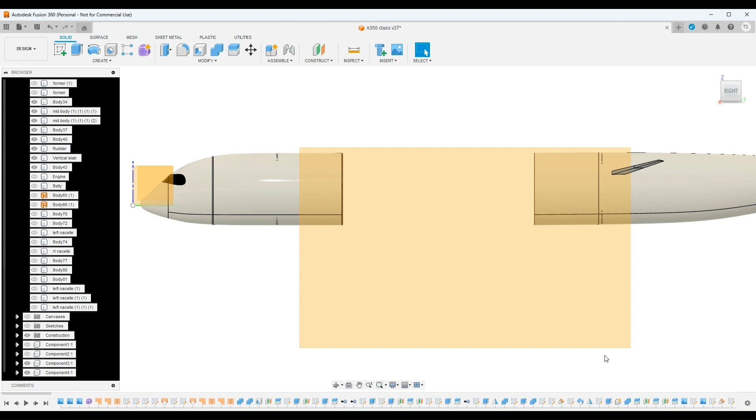First of all, like before, I need this plane. If you follow my last video I showed you how to get this plane here, so I'll just go over it real quick again. Let me turn the canvases on here.

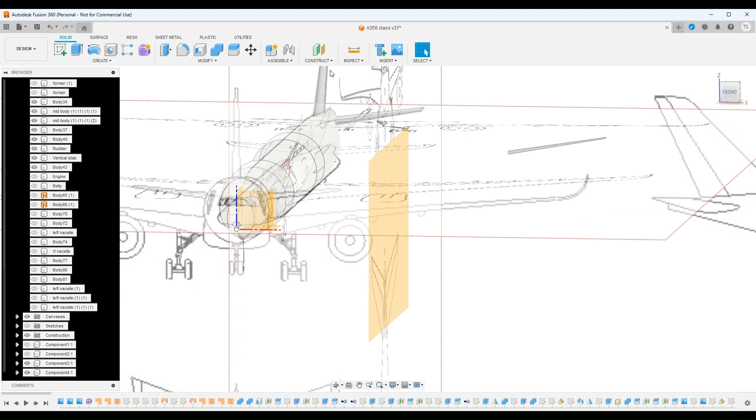This plane needs to be centered here, so you do an offset plane. You come up to construction, click offset plane, then click this plane here, and move that plane so it's in the center, pretty much in the center of this circle here. So you would move this over until it's right over there, and then click OK.

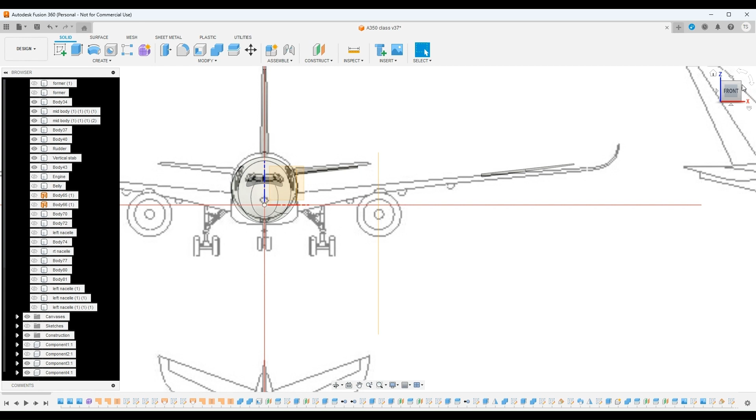But since I have it there already, I don't need this one. So there we are. Next, what I want to do is draw this here, but first I need a line in the center here, and this cone in the back here.

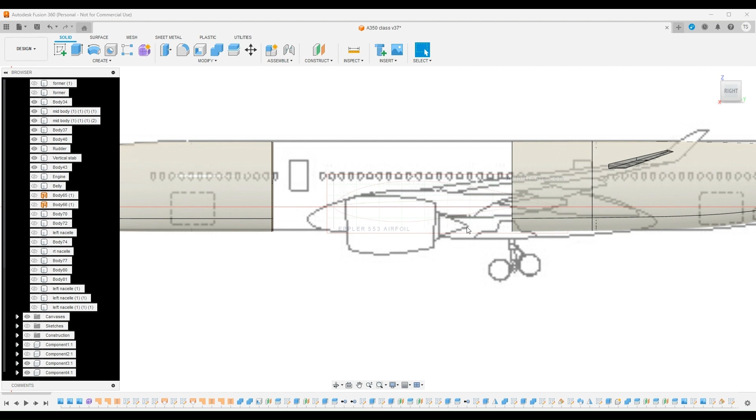Let me turn this construction off. Okay, this right here is the center of this nacelle. So what I'm going to do now is turn the construction back on so I can see that plane. I want to draw on that plane, so I want to draw on this plane here.

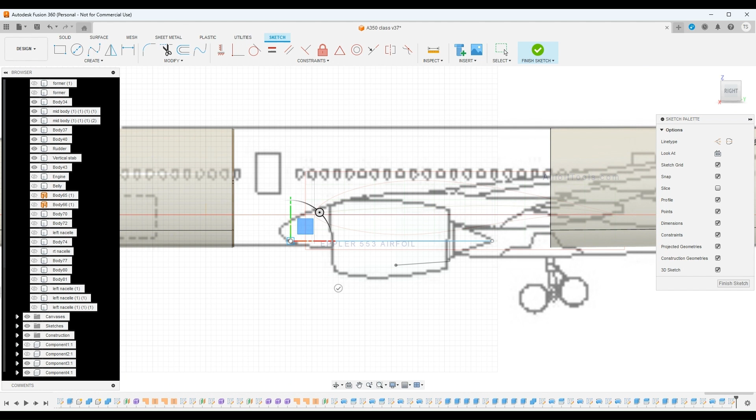I'm going to use a line, L for line, and start here, come over forward, and click OK. And there's our first line.

Next, what I want to do is draw another line from here up to here, and click OK. And one more line from here up to here, and click OK.

Okay, now come up here. We want to do an arc, 3-point arc. I want to use this point and this point. Then I'll just try to match this arc as much to this line up on top here as possible. Click OK. And that's that.

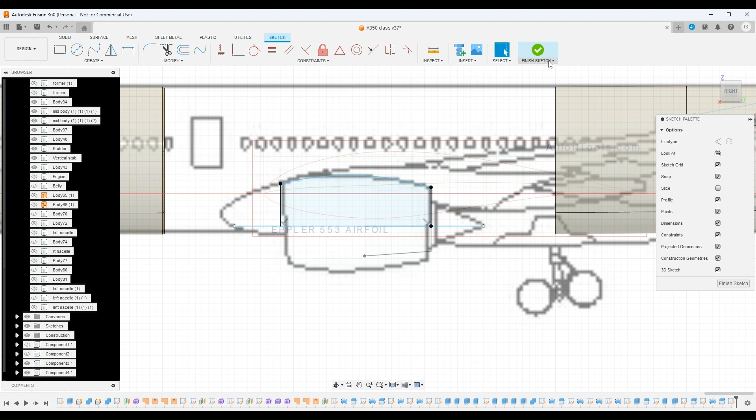Now go ahead and finish sketch. Turn the sketches back on. I'm going through this pretty quick. I go through it slower if you watch my previous video on how I do the nacelle, but it's just showing you right here too.

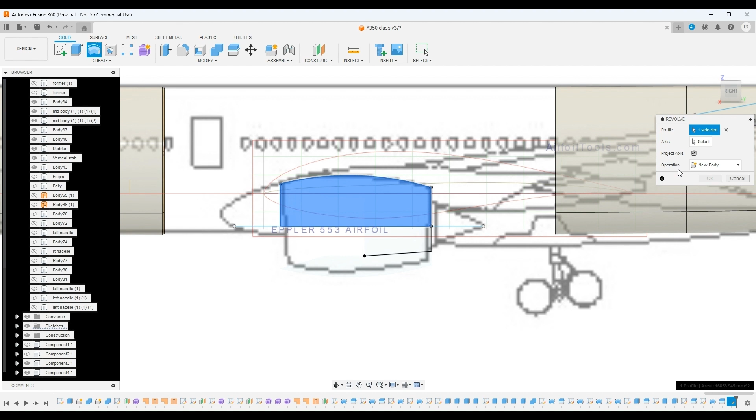So now what I want to do is use the revolve tool, and this is the profile I want to use, and this is the axis right here I want to use, and new body, and click OK. Now there we have our engine nacelle.

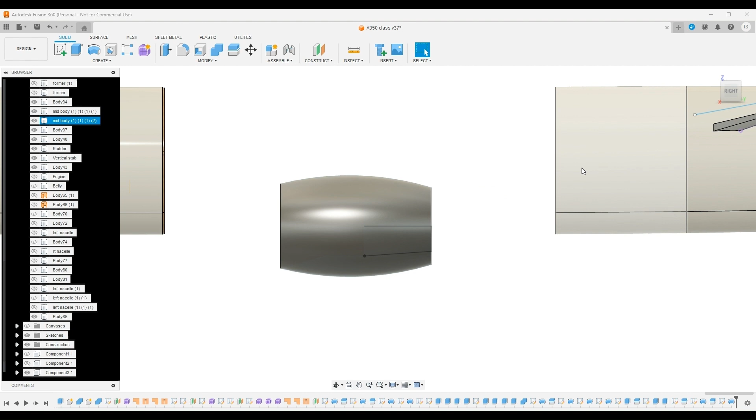Now I can go ahead and turn off the canvases because I don't need them. So this is what we have. Now I need to split this in half.

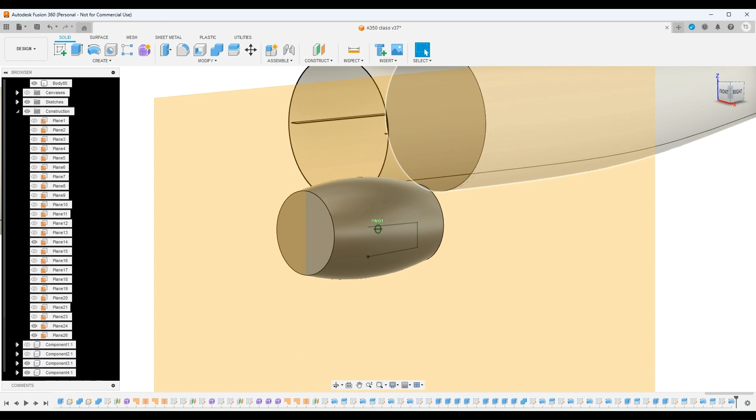So I turn the construction plane back on, the one that I need. Come over here to construction, and it should be down the bottom, the last one that I did. And come up here to modify, split body.

This is the body to split. And the splitting tool, select that. I want to use this plane here as a splitting tool. And click OK. Now I can turn these construction planes back off.

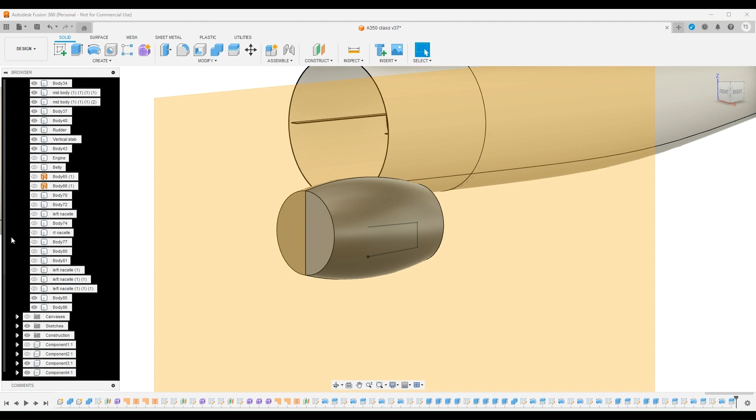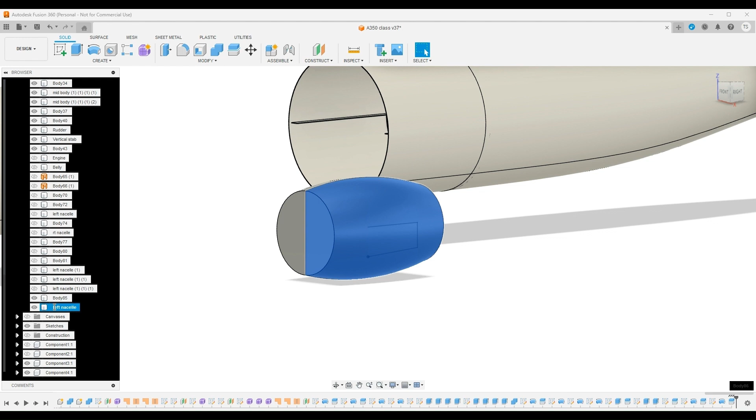Okay, now we have two parts here. I want to turn this part off, the left side. And what you should do is, this being the left side, come down here, change this to left side nacelle. Hit enter. I'll turn that off, and this is the right side nacelle. Now we have that.

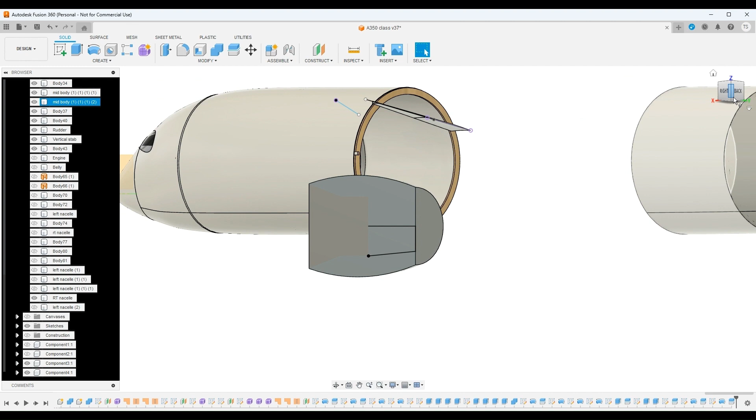Now what I want to do is take the measurements of my fan. I'm using a Wemotec 90 millimeter fan, and the outside diameter is 92 millimeters. So 92 millimeters, and I want to add 25 hundredths to that so this fan will fit down in there.

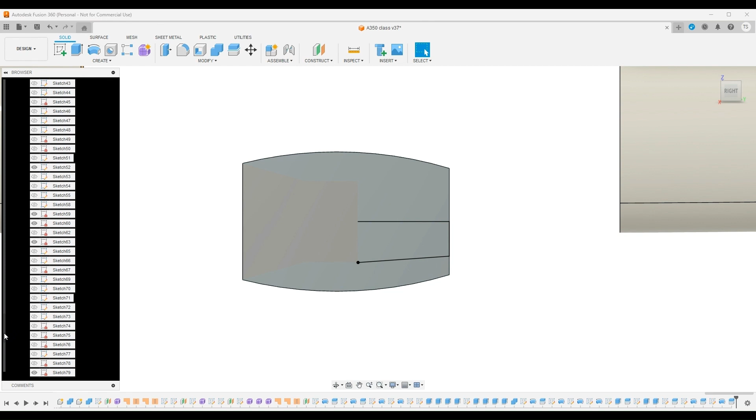So what I want to do is turn my sketches back on, the one that I need with the center line. Okay. Now, like I said, the outside diameter of the fan is 92 millimeters, and half of 92 is 47.

47. Oh, excuse me, it's not 47. It's 45. It's 46, I'm sorry. So we got 46. And like I said, I want to extend it by 0.25, so I need to take that 0.25 and make it 0.13. So 46.13 is what I want.

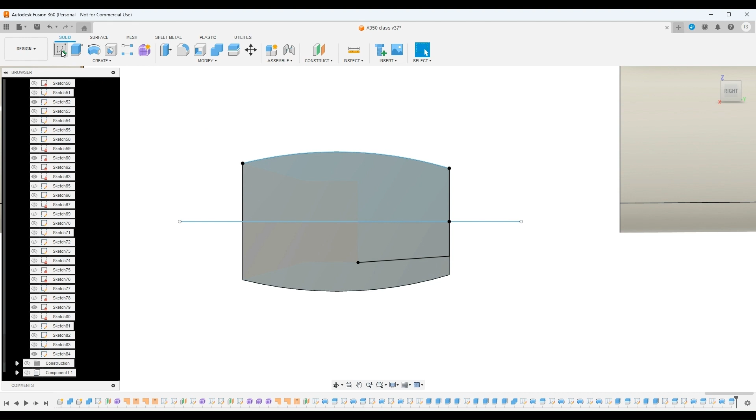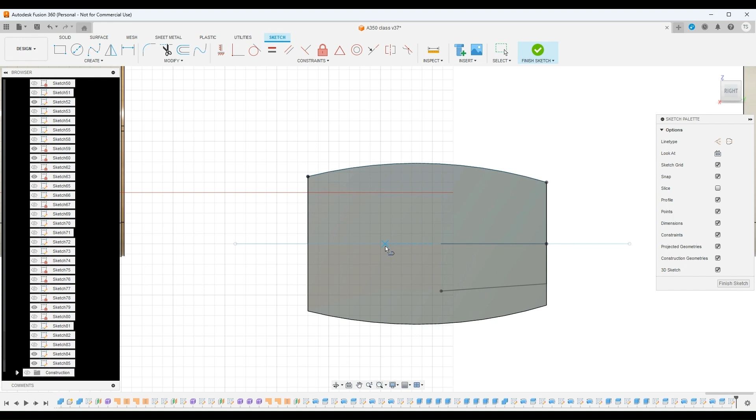So come up here. Now we have create sketch, and we want to create a sketch on this plane here. Now, what you want to do is determine how far your fan's going to go in here, how far back you want it to be. I'm just going to put it right here and start here. So I'm going to hit the letter L for line and click here. And this line needs to be 46.13.

We have that line. Now the next line that I need is the length of the fan. I'm measuring it right now, it looks to be about 59 millimeters. So the length is 59 millimeters.

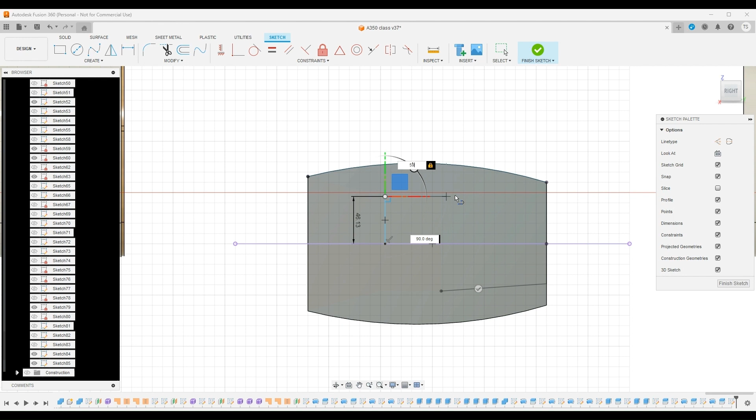So what we do here is type in 59, and I'm adding 0.25 so it will fit in, just a hair bigger. Next line, just straight down onto this line. Click OK. All right, go ahead and finish sketch.

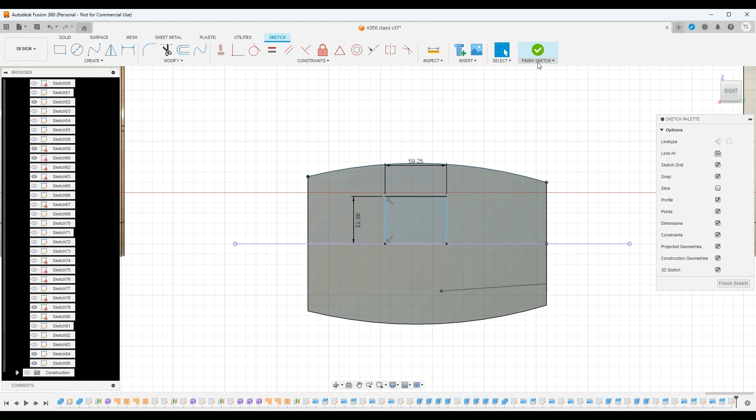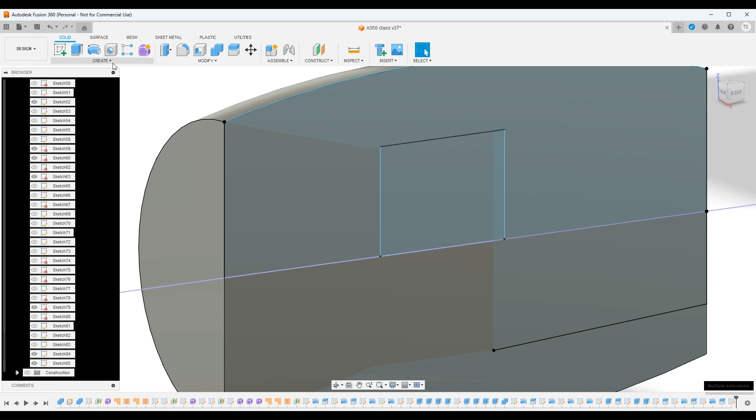Now what we want to do here is revolve this. Fusion seems a little buggy for me right now, but go ahead and give it a shot. We want to use the revolve here. I want to select this plane, and select the axis, which is this, and this is set to cut, and that's what I want. We'll click OK.

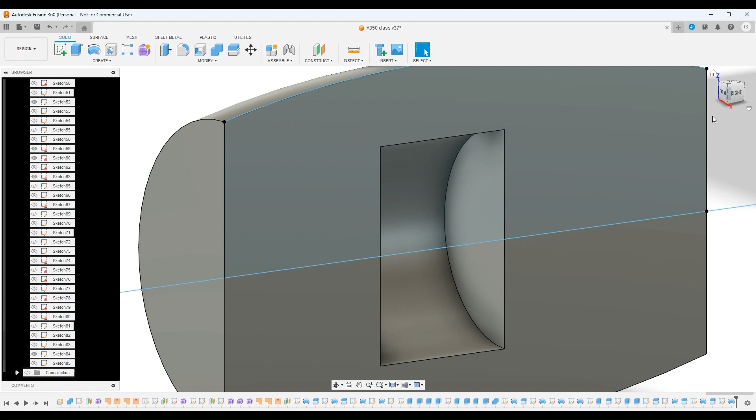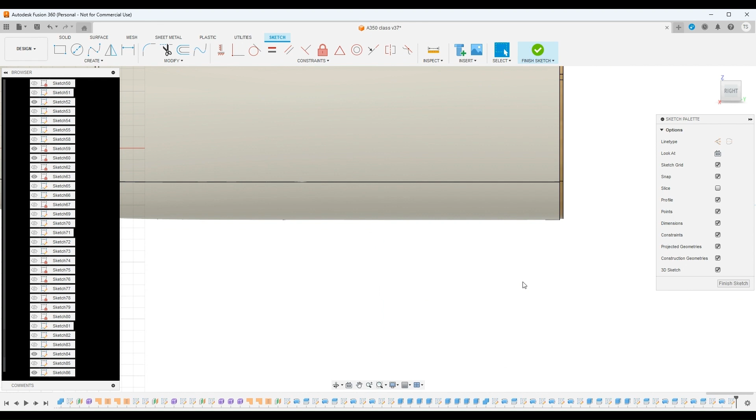That's what we have so far. Now what I want to do next is open up this front here. So we come up here, create sketch on this plane again. Letter L for line. I get this right on there, and draw this line out here.

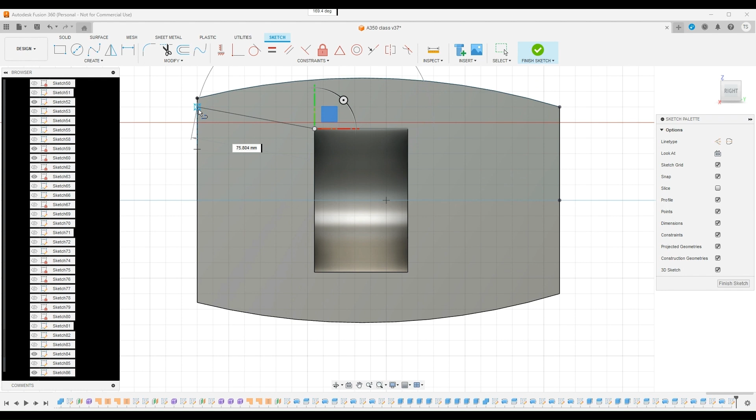L for line again. Here, straight down to here, and go ahead and click OK.

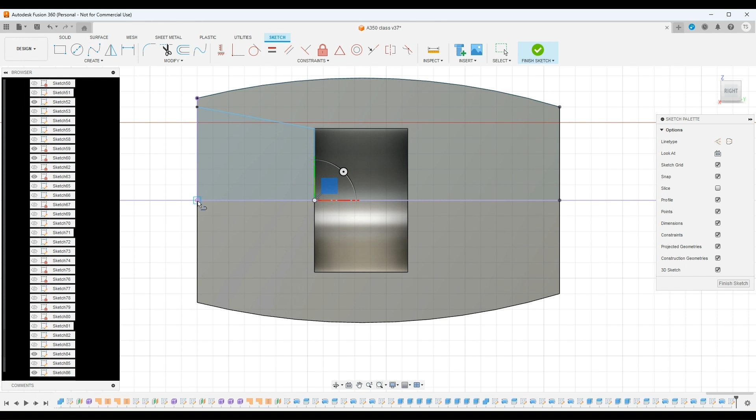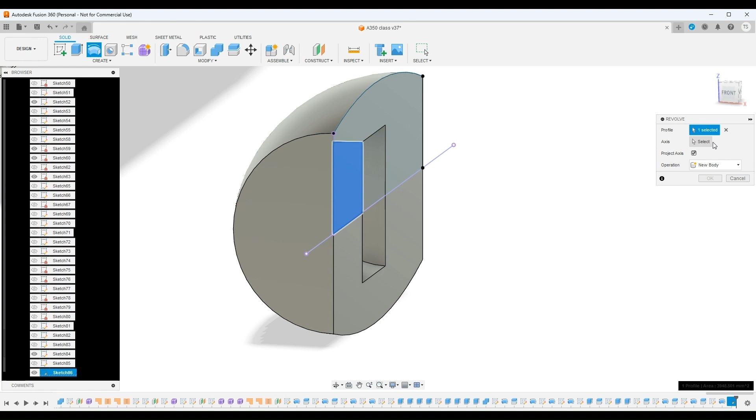Now what we want to do is revolve this. So finish sketch. What you want to do when you do this revolve is make sure this is fully closed and contained. Use revolve again. We want this, and the axis is this, and this is set to cut, and we click OK. Now that's what we have so far.

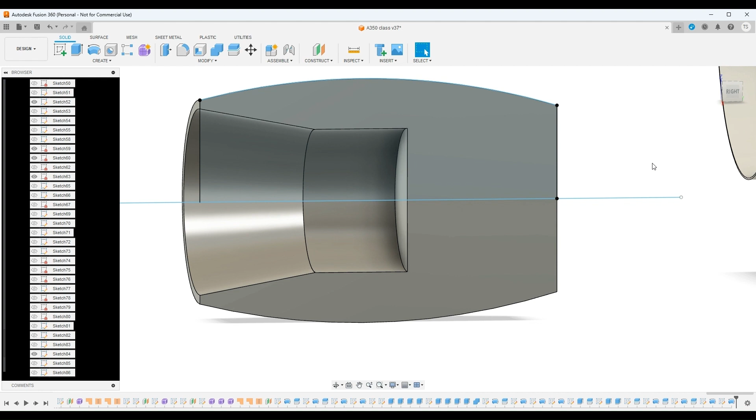Now what you want to do is, before you do all this, the angles and everything, make sure that you have your correct measurements. Right now I'm just using arbitrary measurements except on the fan itself, because I have the fan and I can measure from it.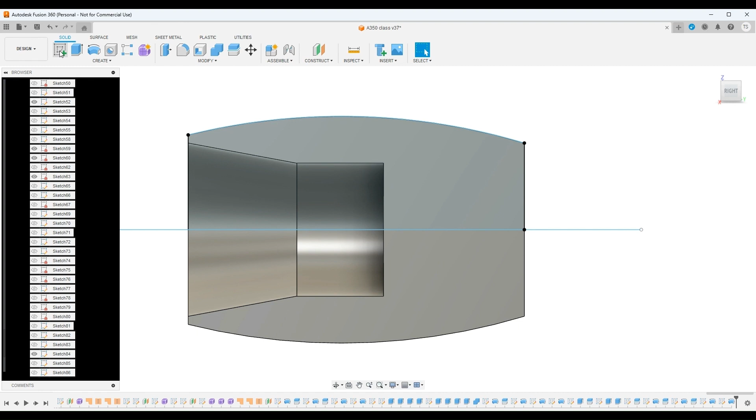Now I want the back here to have an opening. Since this is a 90 millimeter fan, I want this to have an opening of 78 millimeters. So again, we would just come over here to create sketch on this plane, draw on that plane. And we want half of 78, which is 39.

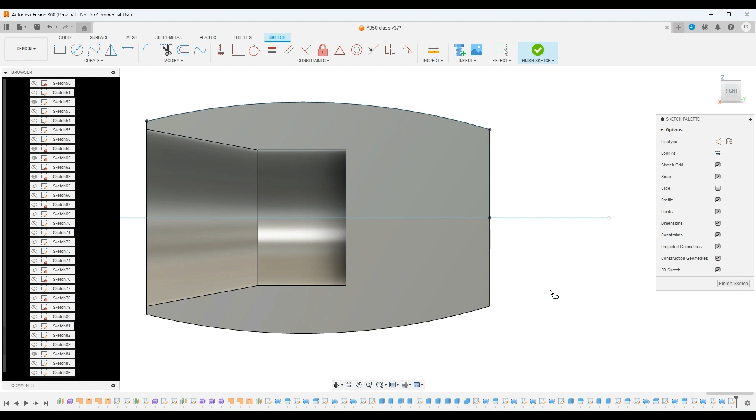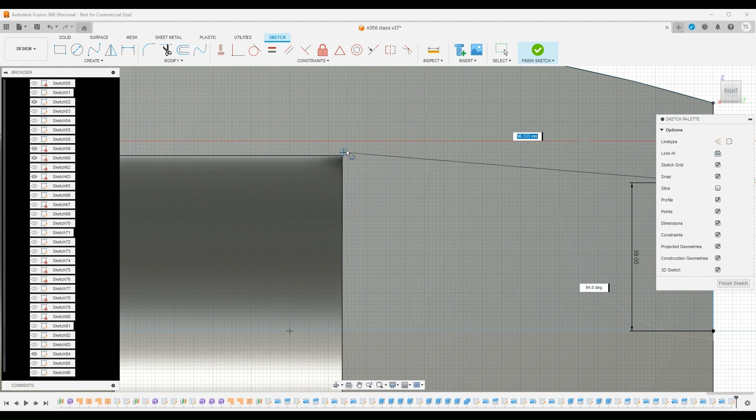So we use the line command, L, and draw a line from here up. We want this to be 39 millimeters. Click OK. Next line, we want to connect it here. And next line, down, just straight down to here. Go ahead and click OK for that.

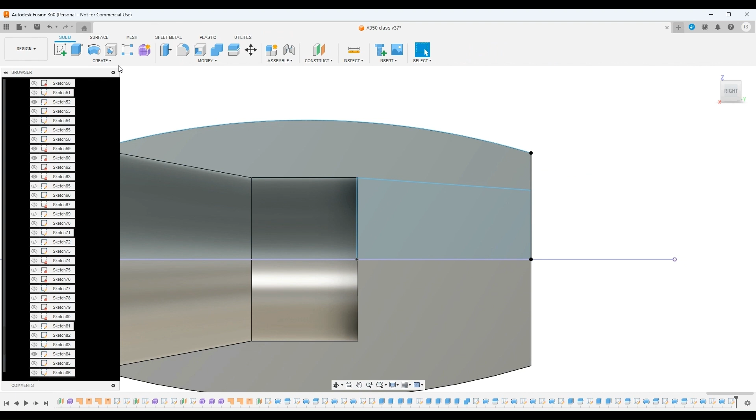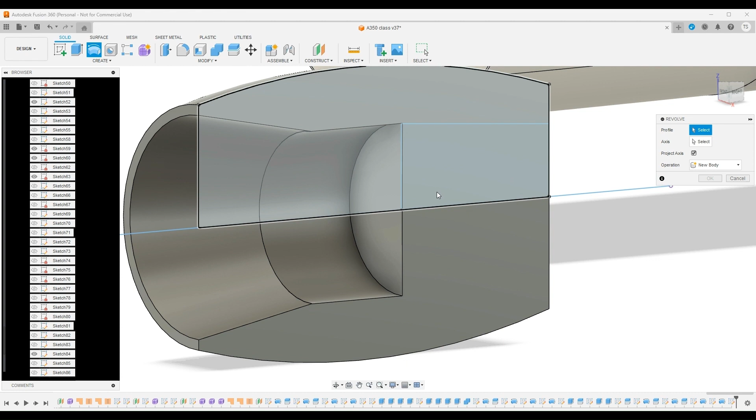Now we have that. Now what we want to do again is finish sketch, come over here and use revolve again. Again this is acting buggy on me, I don't know why. That, and the axis is this, and set to cut, and click OK. Now here's what we have.

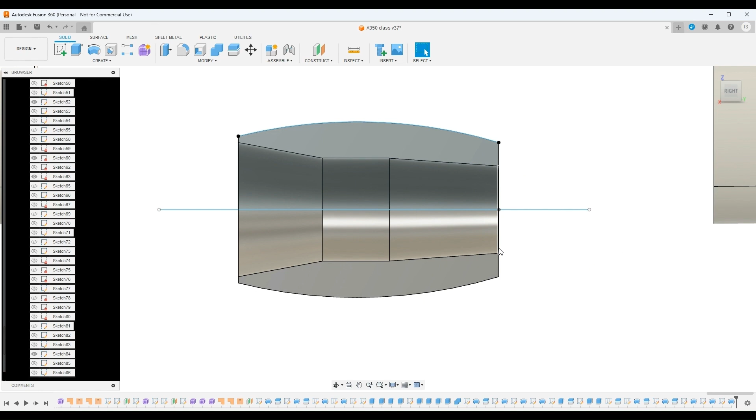Now the 90 millimeter EDF fan should fit in here, and we have the opening back here at 78 millimeters. What I want to do next is up here, go ahead and get rid of that. I'm going to draw on this plane here.

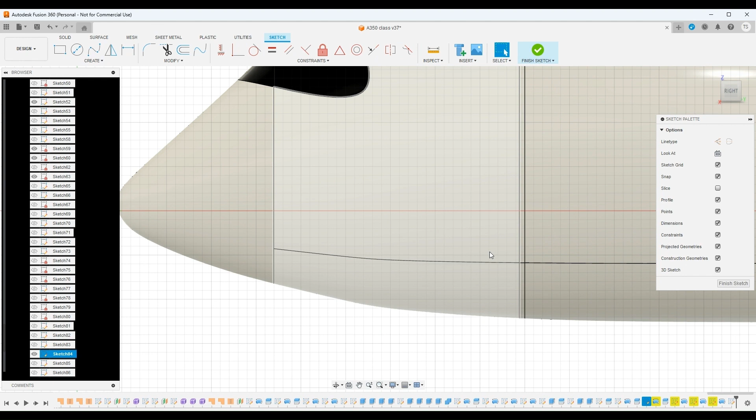What I'm going to do is come over here, 3-point arc. And here, create a little arc here up front, about like that. Click OK, and go ahead and finish sketch.

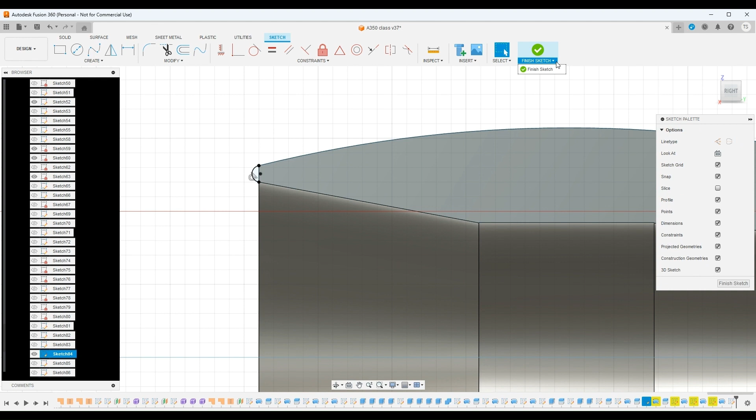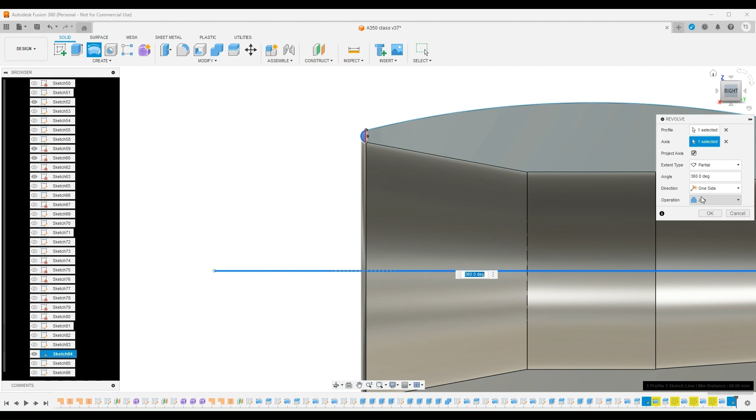Now use the revolve tool again. We want this, and the axis to revolve this on is this. What I'm going to do here is not join it, I just want it to be a new body because I'm going to split it also. Click OK.

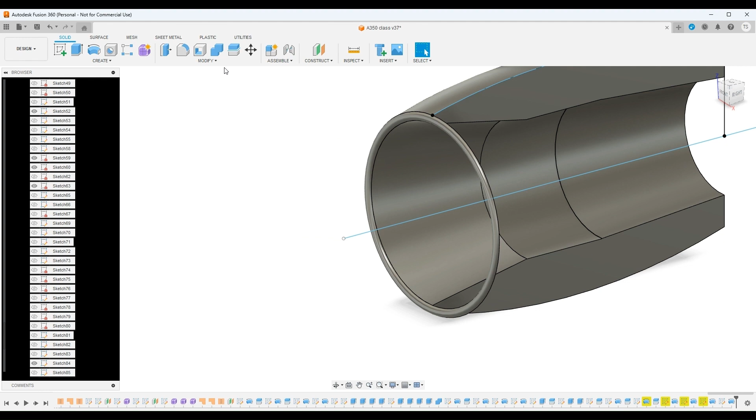Now we made this up front, so I need to split this. So what I'm going to do is split that body, this, and the tool is this. Oops, sorry about that, wrong one. Go ahead and cancel that, or the tool, and use this. Wrong one again.

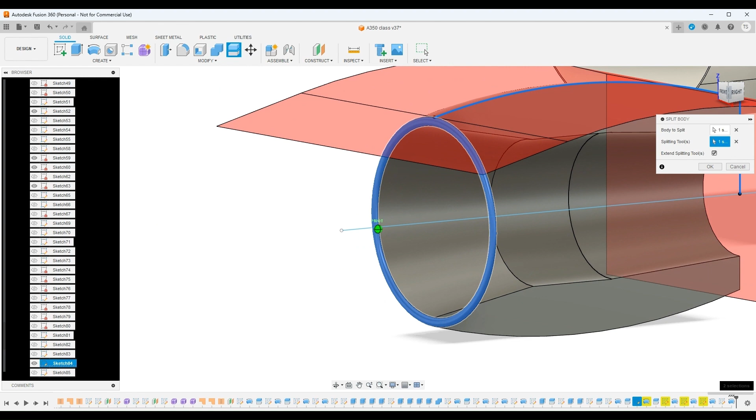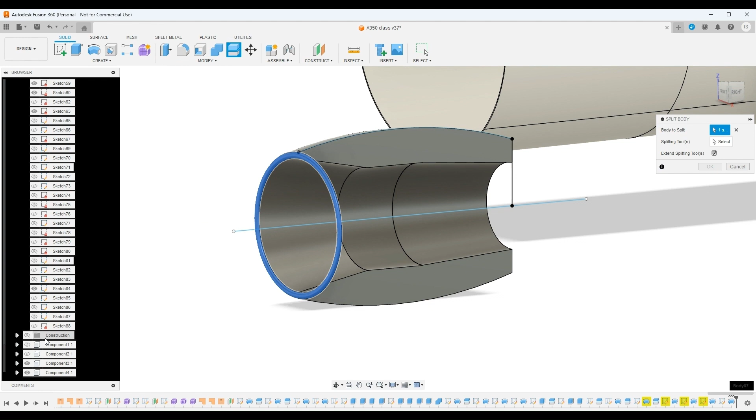All right, so what I just need to do is draw a line in there to split this. So what I'm going to do, not draw a line, is a construction plane. So again, come down here, but first, split body. This is the body. Come down here, use construction, and the splitting tool is this plane here, and select OK.

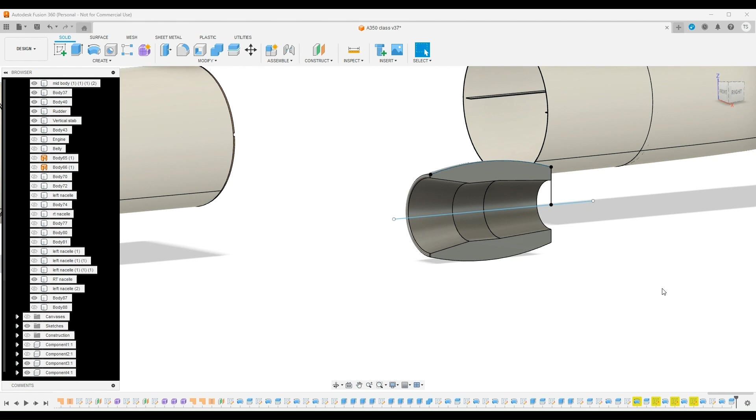Now there we have it. Now I'll go ahead and turn the construction back off, and this half over here of that I can turn off too. Go ahead and minimize the sketches here, find that one, and just turn that off. There, now we have that.

Now the mounts for the EDF fan, to do those, measure them at the back. Measure them right now, and it's 12 by 30. So 12,

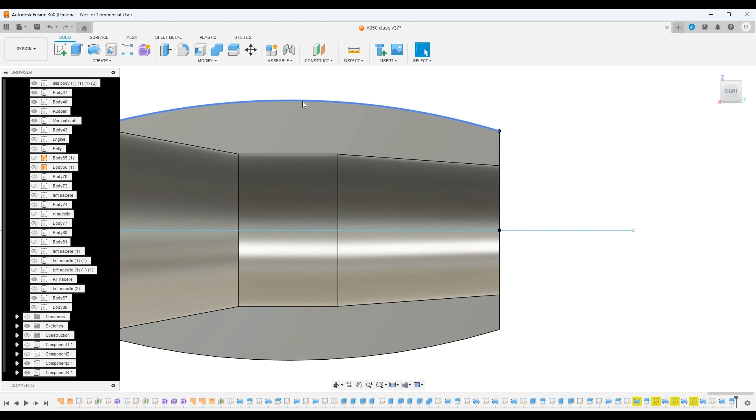Come up here first, select this plane here, and L for line, and draw a line here. I want this to be 12.25.

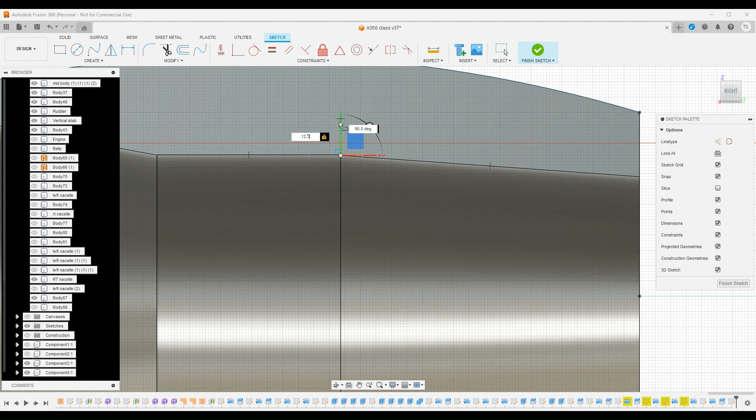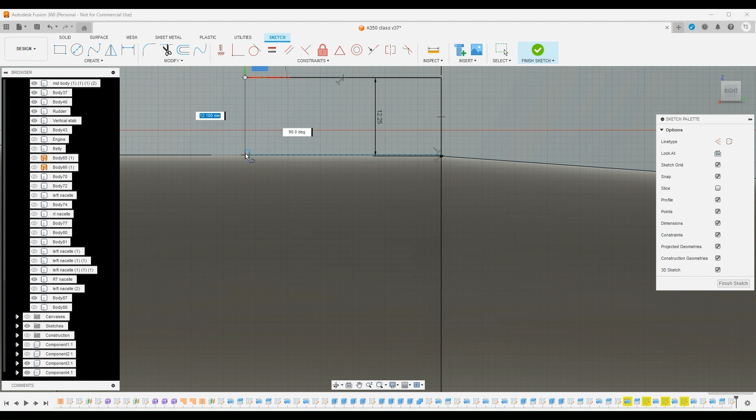And the next line, it needs to be 12.25. And this, lock it onto this line here, but straight down. Click OK. Now we have that. Go ahead and finish sketch.

Let's see something here. Make sure I got this right.

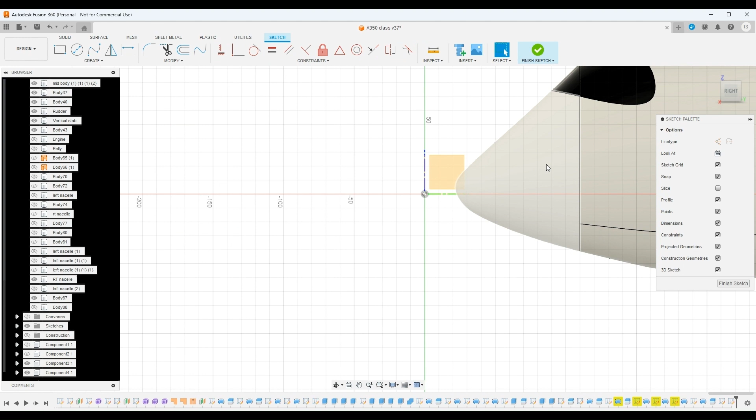Okay, now what I want to do, the thickness of the mount is 3 millimeters. So 3 millimeters is half of that would be 1.5 millimeters. So I'm going to make that 1.513.

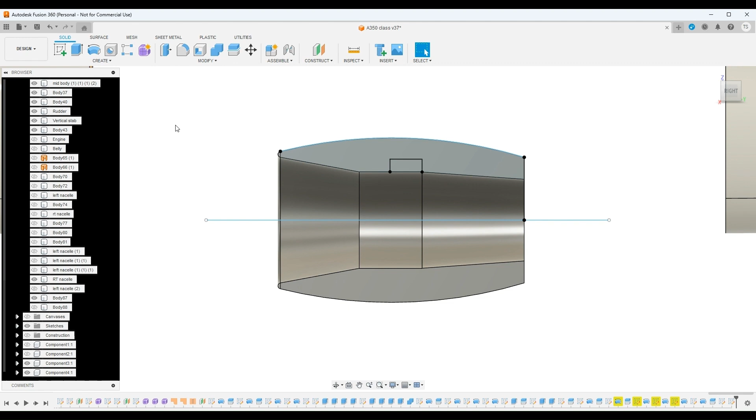So I'm going to come up here. Well, let's see, I'm going to extrude this, or I could a couple of ways I could do this. I'll just use an extrude. And I want this set to cut.

And move that into negative 1.513, and click OK.

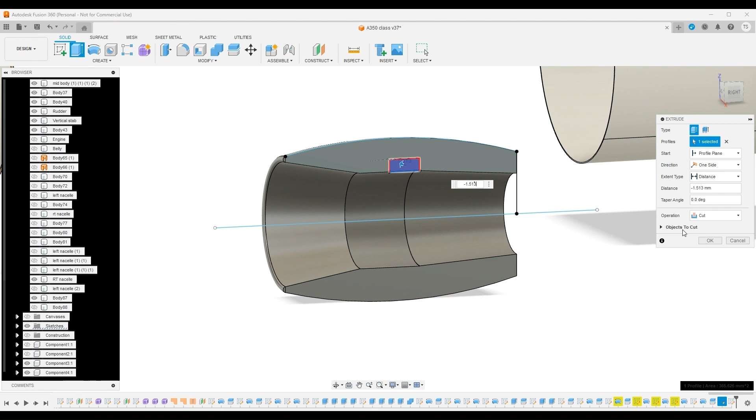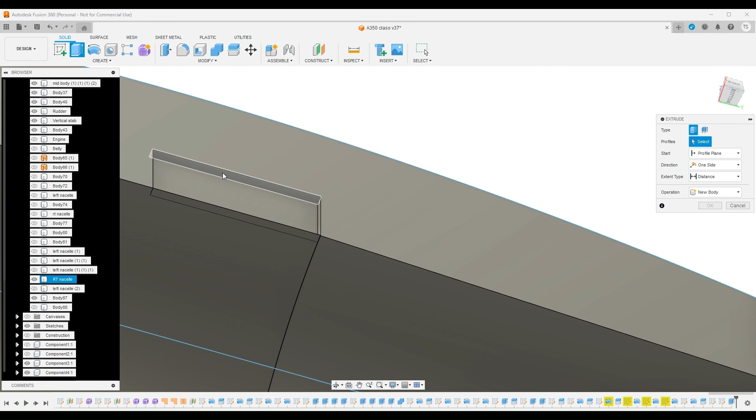Now we have that down in there, and you'll see this little part here is still there. So what I'm going to do to get rid of that, I'm going to use another extrude, and I'm going to extrude this, and set this to cut, and just pull this out and cuts through that, and click OK. Now that's gone.

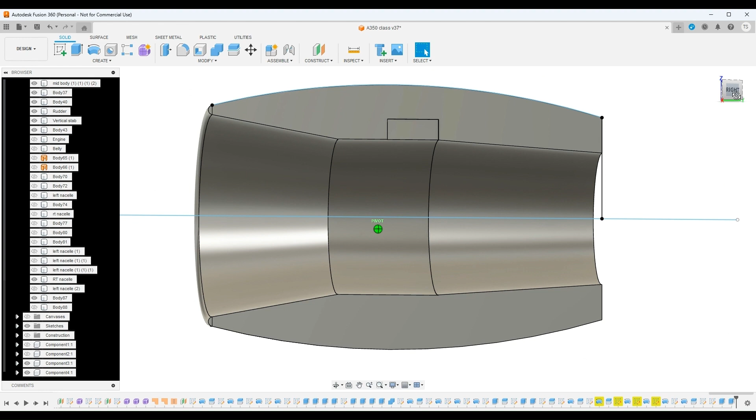Now what you want to do, it's the same thing to the other side with the measurements and stuff. So go ahead and do that. So come up here, create sketch. This is the body to draw on. L for line. Now here,

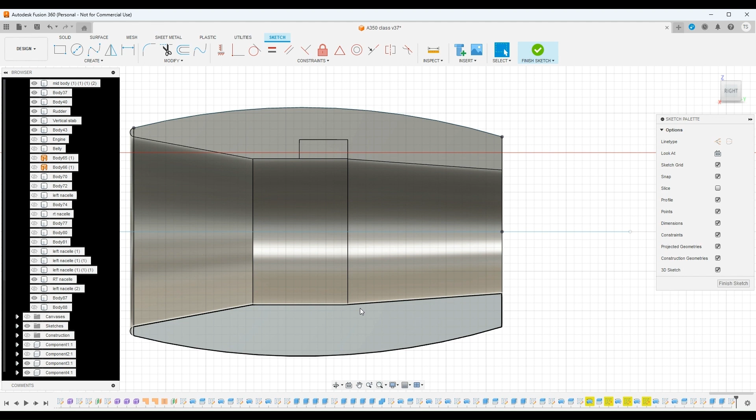Click here. This line was 12.25. But it, for some reason, this moved, but no worries. Go ahead and delete that. Okay, again, L for line. And 12.25.

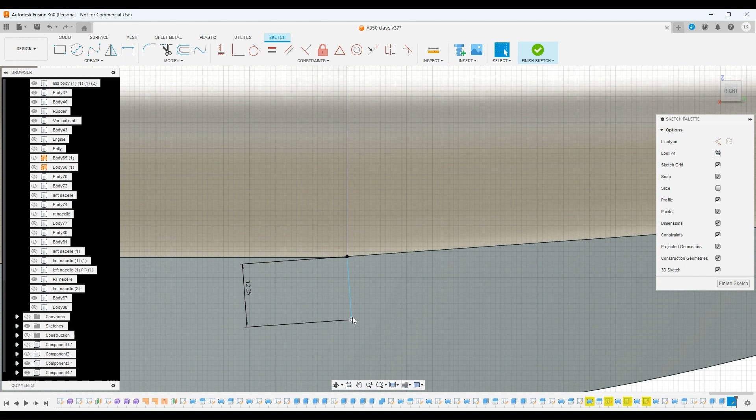It's odd, it keeps moving. Click OK. Now this has a lock on it, so right click on that, delete that. Now, there we go.

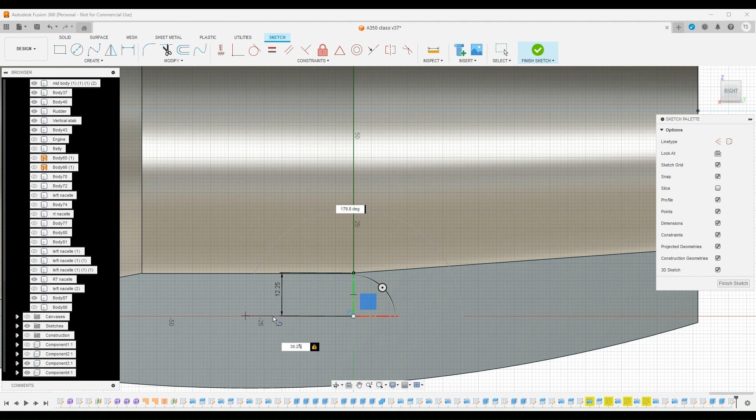Now the next line again, L. Now this needs to be 30.25. And draw the next line just up. Okay, now we have that. And go ahead and finish sketch.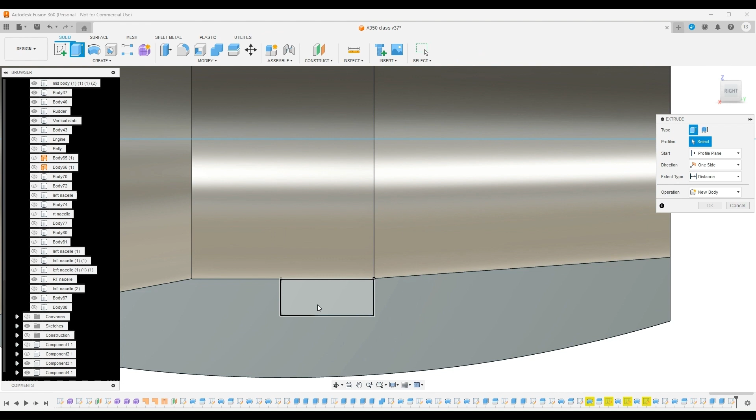And now letter E for extrude. This is what I want to extrude. And that went down 1.513. Move this. Negative 1.513. And set to cut and click OK.

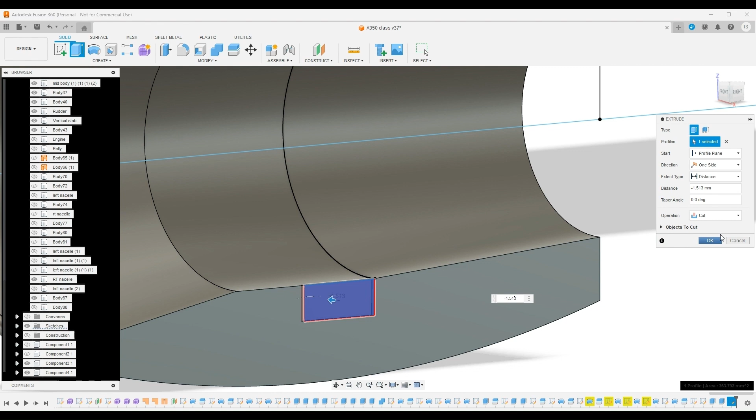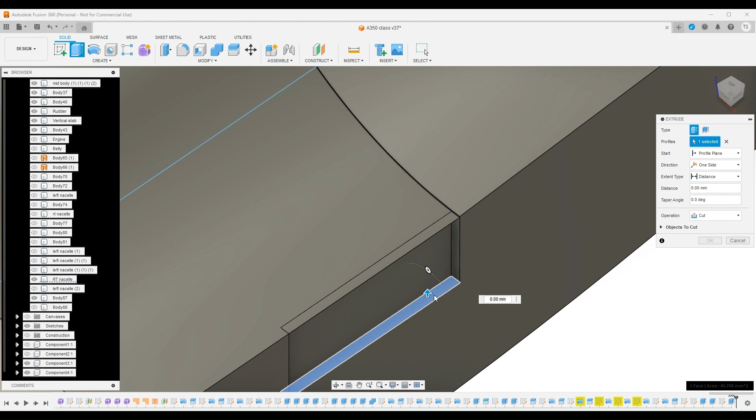Now again, this little piece is over here. So what I'll do here is select this right here, letter E for extrude, which is this, and set that to cut and pull this up. And that's the little thing there said there was no body to intersect the cut. That just meant that it hadn't reached this point up here just yet. And once it reached that point, then it knew it was cutting that. So

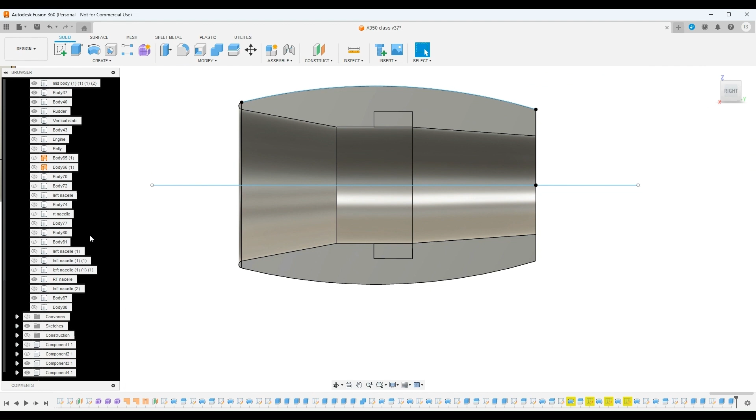Go ahead and turn the sketches off. And there you have it. The 90 millimeter EDF fan, the Wemotec, should fit right in there now.

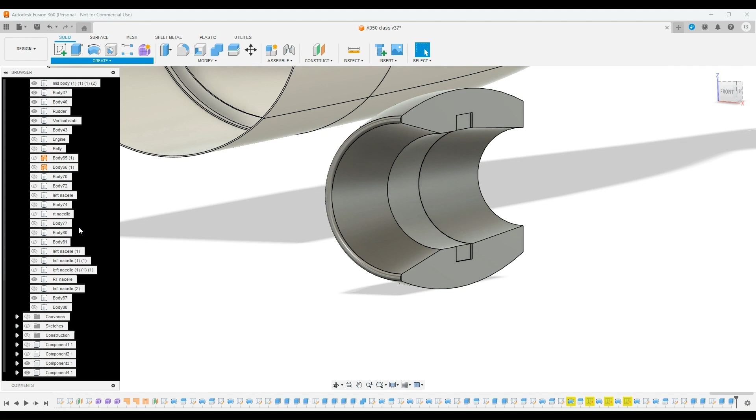I only did half because this is just, all you're going to do is just mirror this. So you'll come up here and select mirror. And this is what you want to, object you want to mirror, then the plane.

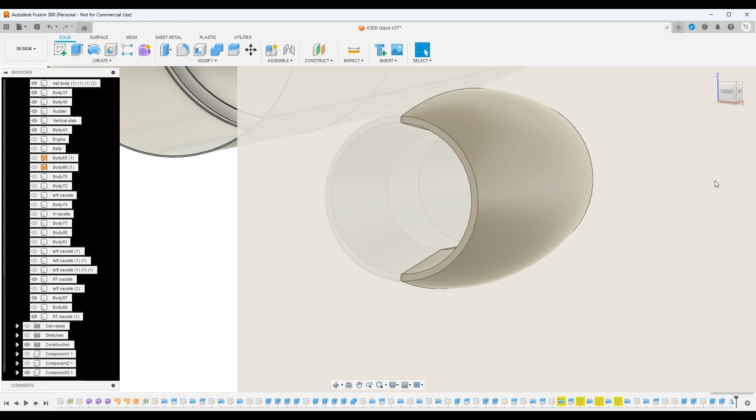Then you come over here to construction and use this. And just make it a new body and click OK. And you can turn the canvases off again. Canvases and construction. And there you have that.

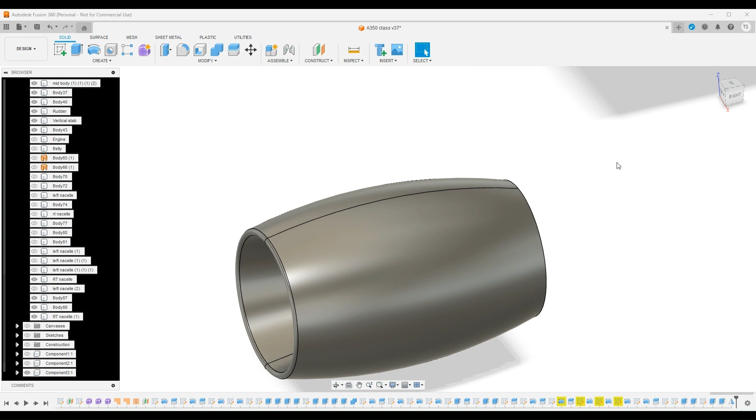And it's just that simple to do that. And we can turn that ring on the other half of this back on too. And there you have it, the 90 millimeter EDF fan. The Wemotec should fit in there perfectly, and that should close up. We've got everything in there.